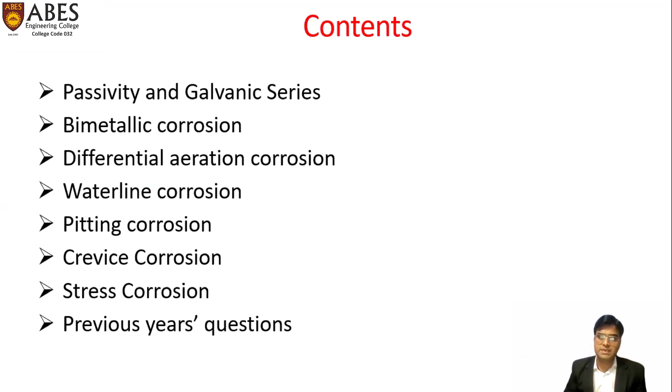So let us first define what is passivity. Passivity is the phenomena by which a metal or alloy shows high corrosion resistance. It exhibits much lower corrosion rate than what can be expected from its position in the electrochemical series. The passivity arises due to the formation of a very thin but highly protective film on the surface of the metal under specific environmental conditions, due to which it begins to act like a noble metal.

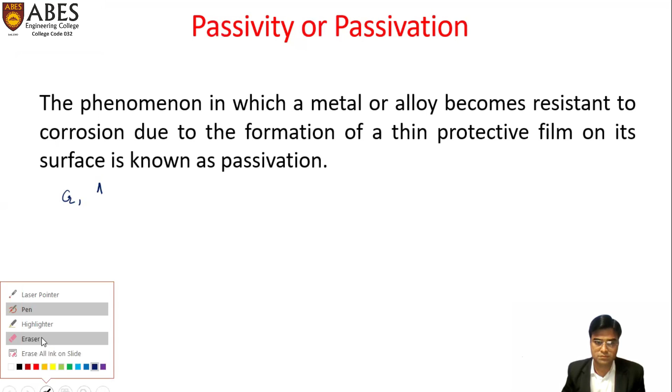For example, metals like chromium, aluminium, nickel, and titanium, and some steel alloys which contain chromium, show exceptional corrosion resistance in oxidizing environments due to the formation of an insoluble oxide film on their surface. So this is how passivity in metals arises.

However, a passive metal can be converted, it can turn into an active metal when environmental conditions are changed.

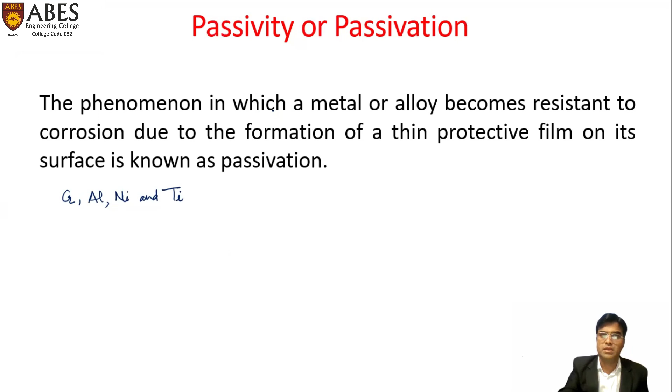As discussed in the previous slide, due to the formation of protective oxide film on the surface, the metal acquires passivity and behaves very differently from what we can predict from its position in the electrochemical series. Hence, a more precise and practical series should be prepared, which may give real and useful information regarding the corrosion behavior of metals and alloys in a given environment.

The greater the difference in position between two metals in this series, the higher the chances that corrosion of the anodic metal will occur.

Now we shall discuss a few specific kinds of corrosion. Among them, the first one is galvanic corrosion. It is also called bimetallic corrosion or differential metal corrosion. As the name suggests, bimetallic corrosion means it should involve two different metals.

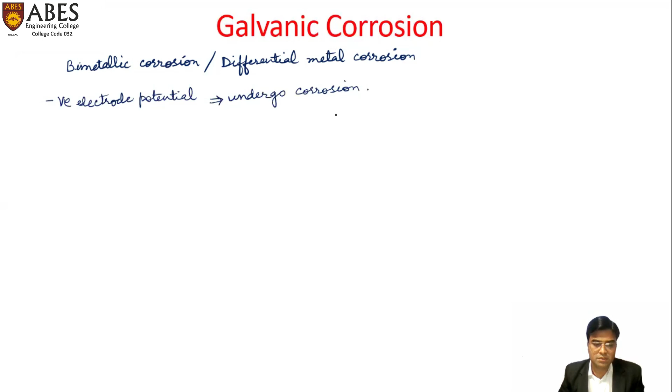For example, if we take zinc and copper and keep them in contact with each other in presence of an electrolyte, then the zinc, which has the lower electrode potential, will form the anode, and the copper, which has higher electrode potential, will form the cathode.

So here we have this zinc rod, and it is in contact with another metal, the copper rod. So this one is the copper rod.

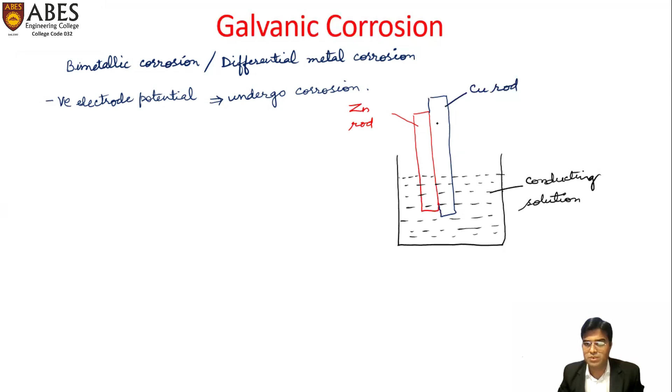When those are exposed to a corrosive environment, this is the conducting solution, which can be any electrolyte. So when exposed to the corrosive environment, the zinc rod, which is near the active end, will undergo corrosion.

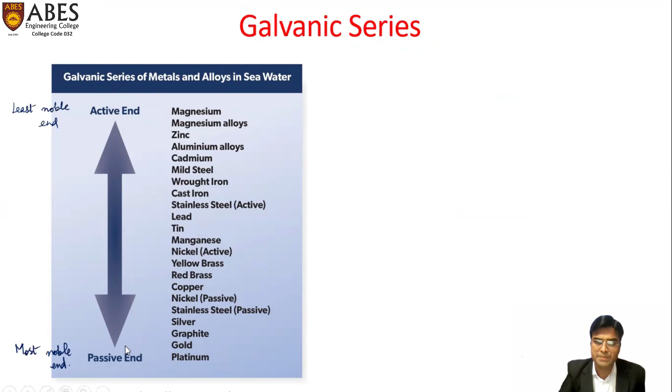It will undergo oxidation, whereas the copper metal, which is near the passive end, remains passive and protected. So zinc is active, forms the anode, and undergoes oxidation, ejecting electrons which move toward the cathode. The copper rod, which is passive, works as the cathode here.

So we can understand here that zinc works as the anode, which undergoes oxidation - that is basically the corrosion process. And copper remains protected due to its passive nature.

So the reaction occurring at the anode can be shown as zinc solid converting to zinc ions, which go into the solution, and electrons are ejected. So this is how zinc undergoes corrosion here.

The galvanic corrosion can be prevented by a few methods. Among them, the first one is avoiding the galvanic couple. It means we should choose the two metals in such a way that the potential difference between those two should be minimum.

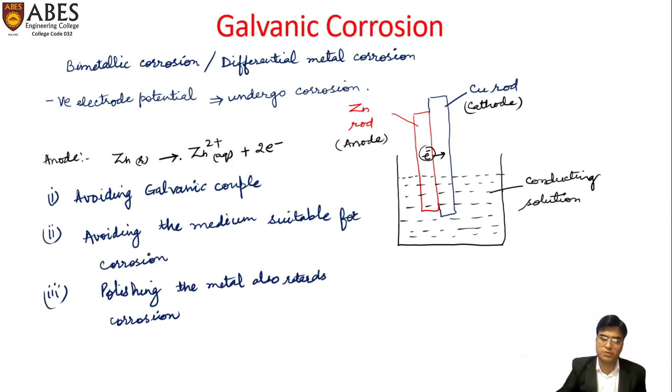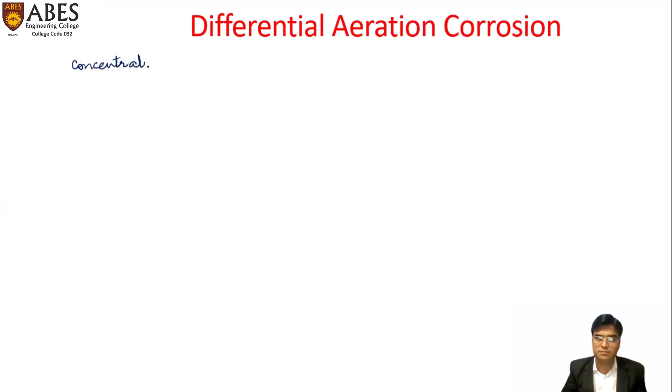The next kind of corrosion which we are going to discuss is differential aeration corrosion. It is also called concentration cell corrosion. This kind of corrosion is self-explanatory by its name. It occurs due to electrochemical attack on the metal surface, when a metal surface is exposed to an electrolyte of varying concentration or varying aeration.

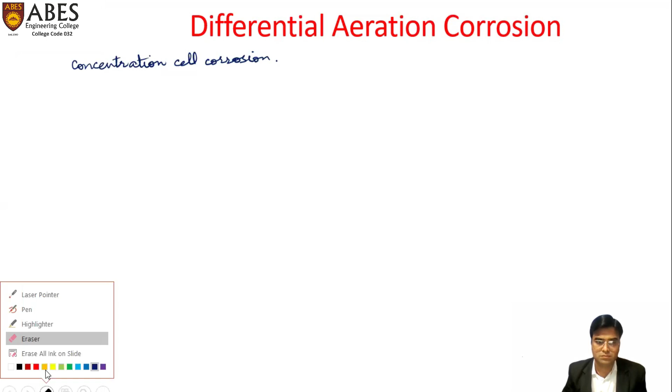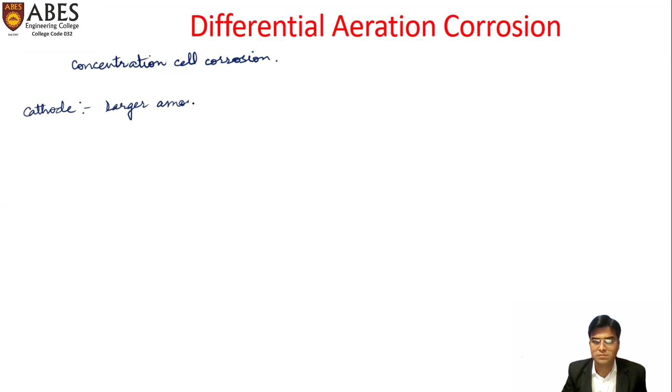Differential aeration occurs when a metal surface is partially immersed in an electrolyte and the other part of the metal is exposed to the air. Under such conditions, the metal areas exposed to a greater amount of air or oxygen behave as cathode, and the areas having lesser amount of air or oxygen work as anode, having lesser amount of oxygen.

We can understand that anode is responsible for oxidation. So the areas having lesser amount of oxygen will undergo oxidation, and this is the area which will suffer corrosion. For example,

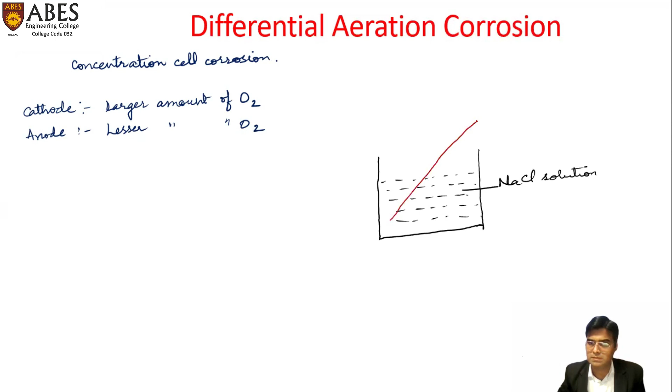we can consider a zinc rod which is partially immersed in a dilute solution of sodium chloride. So this is our container in which we have filled a solution of sodium chloride. In this solution, we have immersed a rod made up of zinc.

The poorly oxygenated metallic part, which is in the solution, becomes anodic. It works as anode and undergoes oxidation. The reaction here is conversion of zinc to zinc 2 plus with removal of electrons. The area exposed to higher concentration of oxygen works as cathode, where the oxygen takes up the electrons ejected from the anode.

The reaction at the cathode can be written as half O2 plus H2O plus 2 electrons, which generate hydroxide ions. The zinc ions from the anode and the hydroxide ions from the cathode combine to form the corrosion product, which is zinc hydroxide.

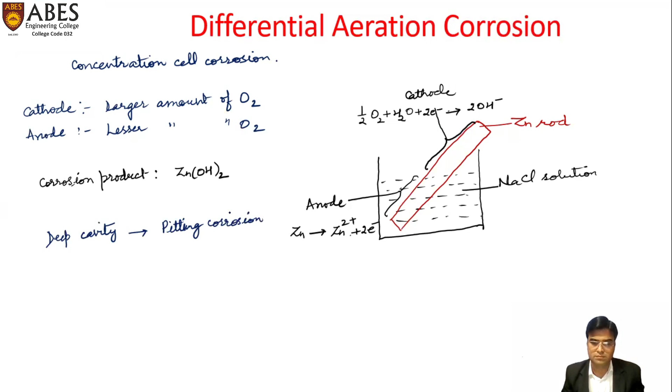The next kind of corrosion is waterline corrosion, a special case of differential aeration corrosion. When we take water and store it in a steel or iron tank for a long time, we can observe some amount of rust begin to accumulate just beneath the level of the water. This is called waterline corrosion, and it occurs due to the difference in aeration at different parts of the tank walls. For example,

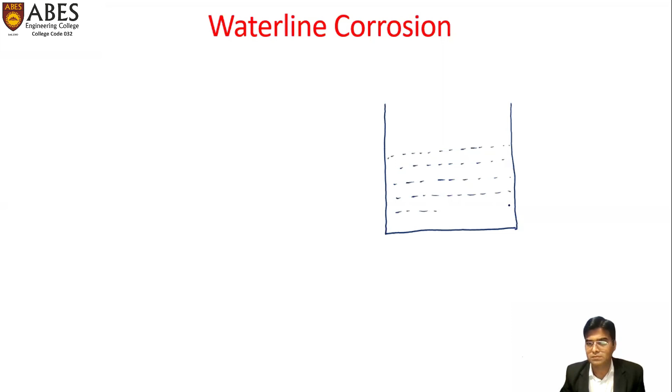we may draw it like this. Suppose this is our water tank, made up of iron or steel, and water is stored here for a long time. So this is water, and this is the steel tank. This is the water level. If the water is held for a long time, we can observe rust just beneath the water level. So this is the rust here.

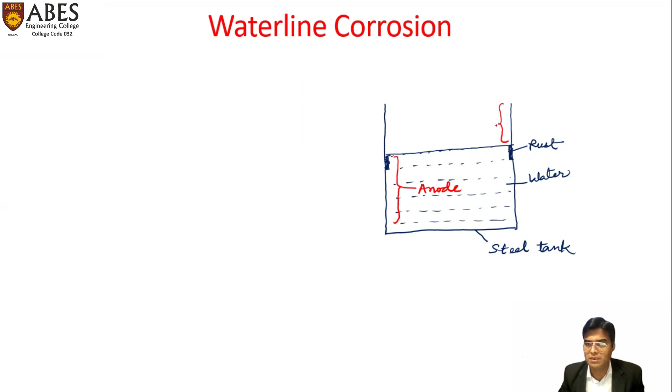It happens because the area above the water line is highly oxygenated, and the area below the water line is poorly oxygenated. So the poorly oxygenated area begins to work as anode, and the highly oxygenated area begins to work as cathode. Due to this difference in aeration, differential aeration corrosion happens here, leading to waterline corrosion.

This area, now working as anode, causes oxidation of iron to occur. The reaction here is iron converted to iron 2 plus, with removal of 2 electrons. These electrons are taken up by the oxygen at the cathode, and the reaction there can be written as half O2 plus H2O plus 2 electrons giving rise to hydroxide ions.

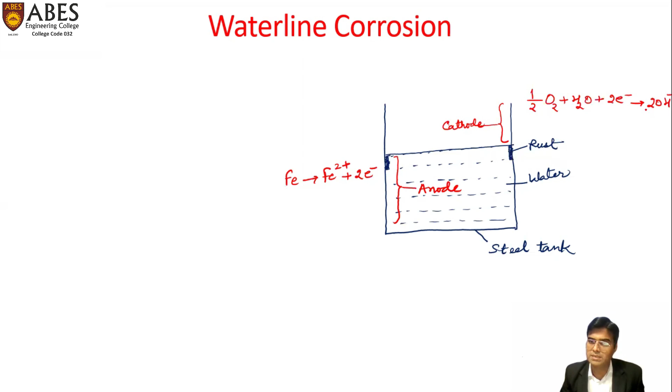So the ferrous ions are generated at the anode, and hydroxide ions at the cathode. These combine to form the corrosion product. Iron 2 plus combines with hydroxide to form ferrous hydroxide, which under oxidizing environment in the atmosphere converts to ferric hydroxide, leading to the formation of rust.

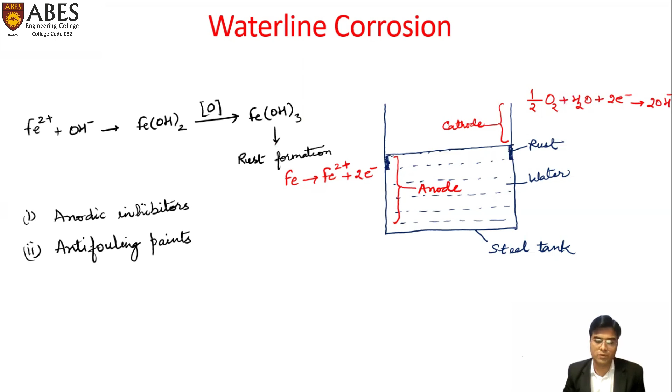This kind of corrosion can be prevented by the use of anodic inhibitors or by the use of anti-fouling paints. We shall discuss them in more detail in the next session, where we shall cover protection from corrosion. The next kind of corrosion is pitting corrosion.

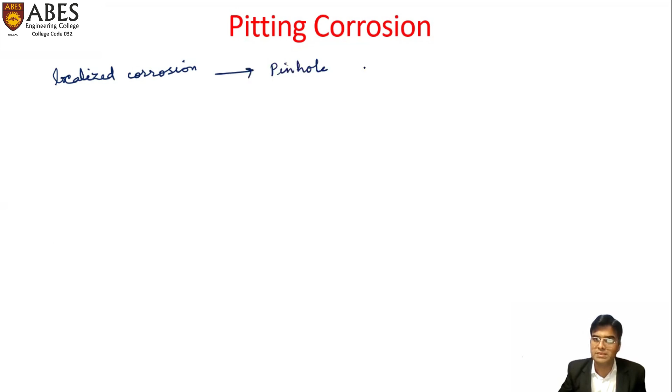The pitting corrosion is a localized corrosion which results in the formation of pinholes, cavities, or pits. It usually takes place when there is a crack in the outer protective oxide layer on the surface of the metal. The crack on the protective film works as anode, and the rest of the oxide layer, which is intact, works as cathode.

Since the area of crack is very small, the anode is very small as compared to the cathode. Because of this very small area of anode, there will be severe corrosion, which will lead to the formation of a small hole or pit in the metal. It can be seen with the help of a diagram.

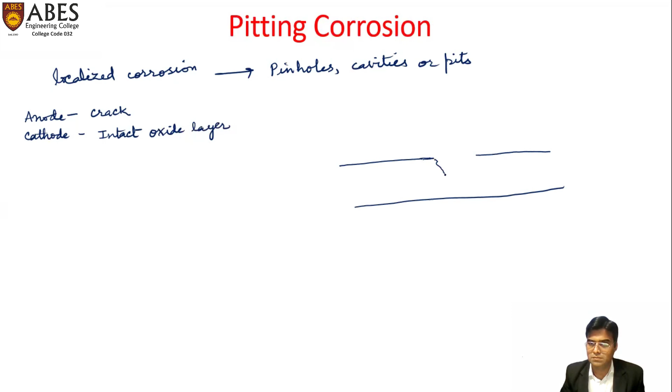Suppose this is the iron bar, and this iron bar had a crack here in the outer oxide layer. So this area will begin to work as anode and it will undergo corrosion. The rest of the area will work as cathode, which is having more access to the oxygen. So corrosion occurs here and the metal undergoes loss of its weight and loss of its strength.

So this area is working as anode, which is having less amount of oxygen. So iron here is converted to iron 2 plus and electrons are removed. This area, which is now working as cathode, it is more oxygenated, and here the reactions which take place can be shown as half oxygen plus water plus 2 electrons convert to the hydroxide ion. So due to the corrosion, the product will accumulate here in the form of rust.

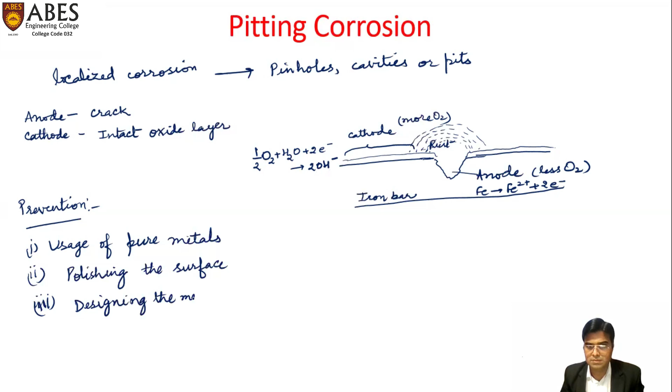In this case, the pitting corrosion can be minimized by usage of pure metals. It means the impurities in the metal should be avoided. Another measure to prevent pitting corrosion is by polishing the metal surface properly. Designing the metal articles judiciously can also be one of the measures to prevent the pitting corrosion. This was about pitting corrosion.

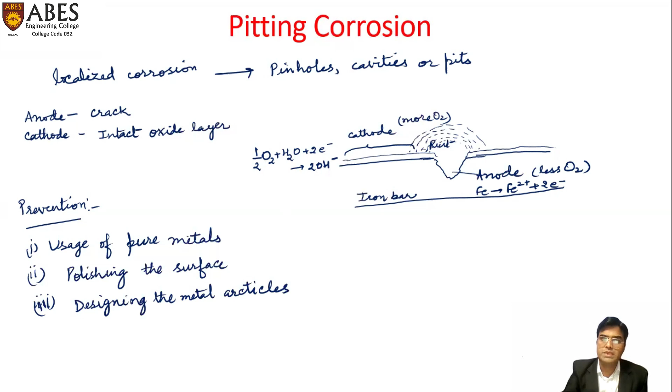Now we shall discuss about the crevice corrosion. The word crevice refers to any kind of gap or crack. So crevice corrosion may be defined as the corrosion occurring at the region of contact of metals with metals or non-metals. For example, the corrosion occurring at the crevices between different metallic objects like bolts, rivets, nuts, washers. These are the examples of crevice corrosion. So crevice has very narrow area.

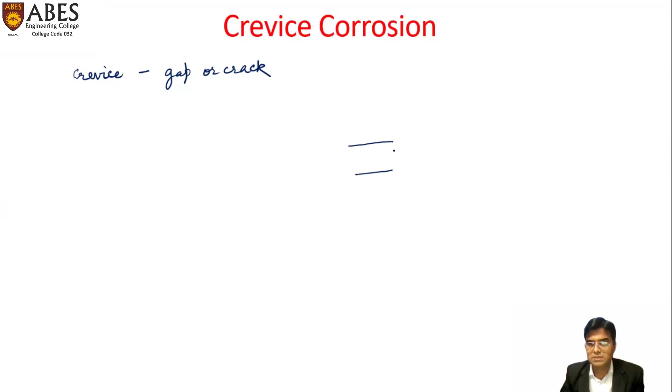For example, it can be shown with the help of a diagram. Suppose this is a metal structure, and here we have a bolt, a nut or a bolt. So these areas are having very narrow dimensions because of lesser amount of oxygen available here. This area undergoes corrosion.

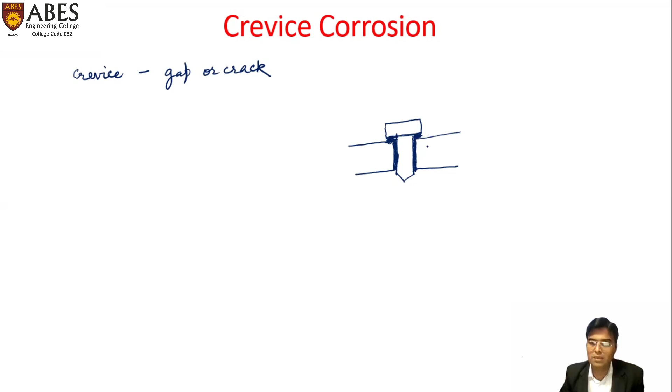Similarly here, due to the lack of oxygen, it works as anode, and this area undergoes corrosion. So this is the rust here, and this rust is due to the anode formation in this area. So this is anode, which is less aerated. This is cathode, which is more aerated.

So in those areas where nuts, bolts, or screws are there, the area which is less aerated becomes the anode, and the area which is exposed to the atmosphere or exposed to the oxygen works as cathode. So the anode undergoes oxidation and it leads to the formation of rust. Deposition of dirt or debris will accelerate this type of corrosion because it will restrict the supply of oxygen to the underneath area.

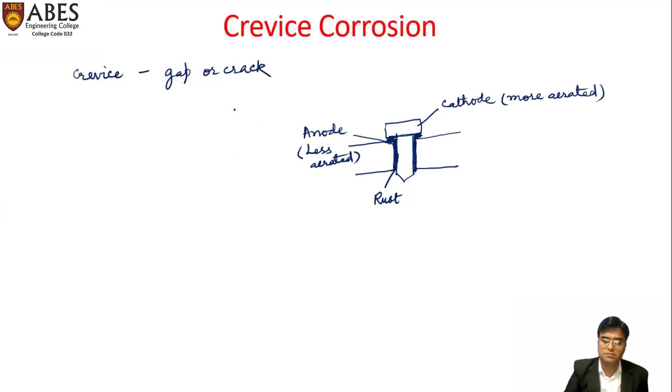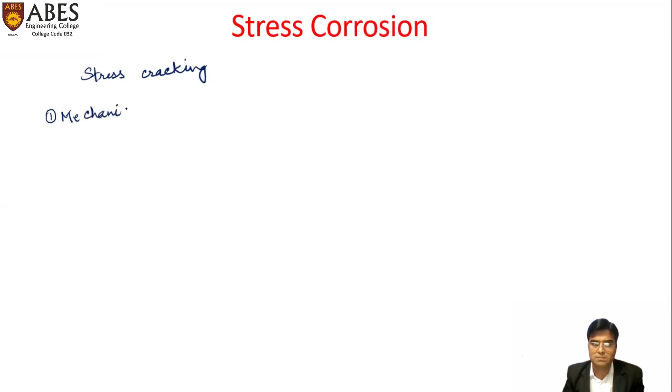Another kind of corrosion is the stress corrosion. The stress corrosion is also called the stress cracking. It takes place due to the combined effect of mechanical stress and the corrosive environment. It means both are necessary for the stress cracking to occur.

If the metal object is under stress and it does not get suitable corrosive environment, then also corrosion will not occur. And if the metal is not having any uneven stress, then the corrosive environment causes the corrosion, but it will not be called as the stress corrosion.

We know when metal articles are fabricated, they undergo several processes like rolling, drawing, and annealing. During rolling and drawing, if the annealing is not done properly, the metal may have uneven stress.

In such cases, the metal areas which are under stress, when those are exposed to the corrosive environment, they begin to behave as the anodic part, and rest of the area which is unstressed works as the cathodic part. So anode is in that area which is stressed, and cathode is that area which is unstressed.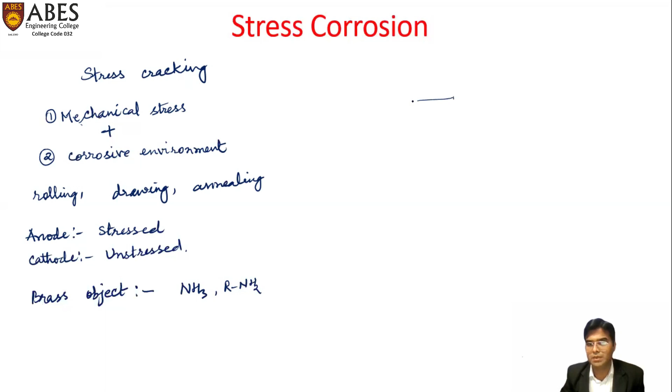Suppose this is our metal object, and here we have different grains. So this is grain A, and this is grain B.

During its fabrication, these areas, if these are unstressed, and this is the stressed part, this area, which is the grain boundary, this is the stressed part.

In that case, it will form anode here, and this area will begin to work as cathode. So because of anode and cathode formation, the corrosion current will begin to flow, and it will lead to the stress corrosion.

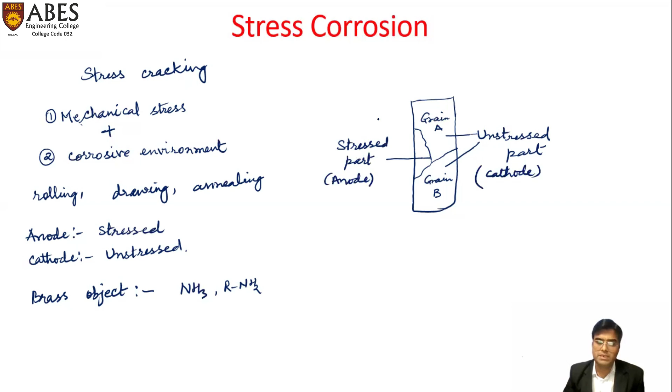Now we shall discuss a few questions which have appeared in the previous year examinations. Question is, why does part of the nail inside the wood undergo corrosion easily?

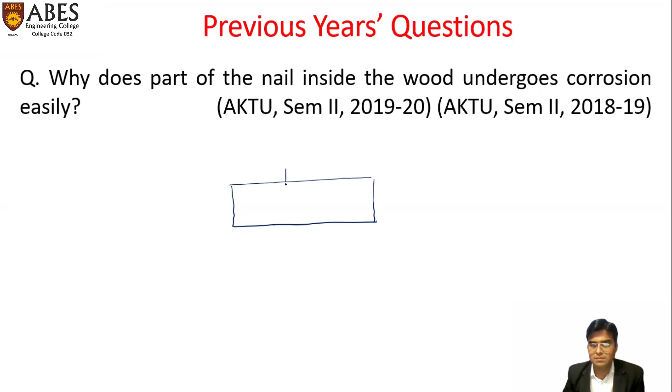Suppose this is a piece of wood, and nail here is shown like this. This area of the nail is inside the wood.

Now we have discussed that the part which is exposed to the air will begin to work as cathode, which has a higher amount of oxygen. So it has more oxygen or more air. And this area has less access to the oxygen. So this area will work as anode because it has less amount of oxygen.

We know oxidation occurs at the anode. So the iron will convert to iron 2 plus, and electrons will be ejected. These electrons will be taken up by the cathode, and here oxygen will take up these electrons to form the hydroxide ion.

So because the oxidation is occurring at the anode, it will undergo corrosion and it will undergo rusting. That's why the part of the nail inside the wood undergoes corrosion easily.

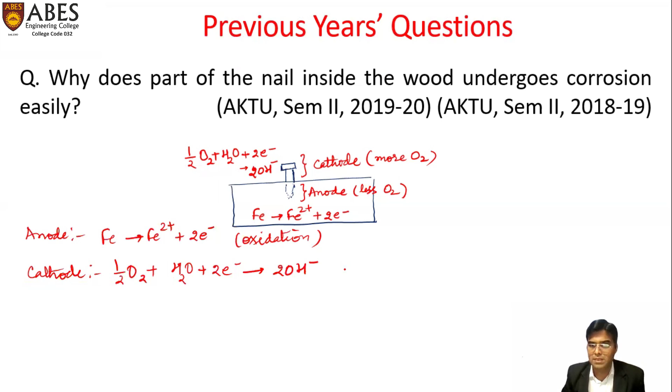At cathode, half O2 plus H2O plus 2 electrons convert to 2 OH minus. This is the reduction process.

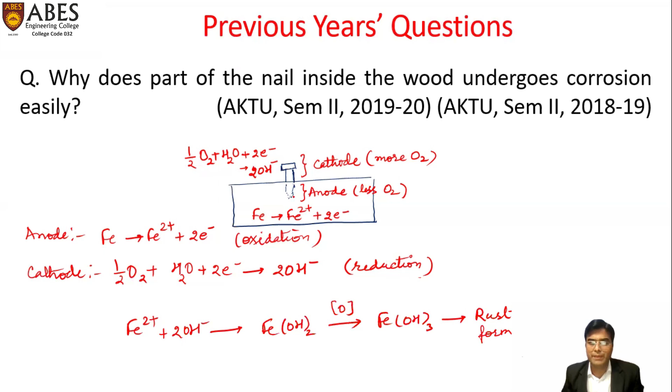And the iron 2 plus and hydroxide ions will combine to form ferrous hydroxide, which under oxidizing atmosphere converts to ferric hydroxide, leading to rust formation. So because the oxidation process is occurring at anode, corrosion is happening at the anode, and that's why the part of the nail inside the wood undergoes corrosion.

Discuss the mechanism of electrochemical corrosion of iron with evolution of hydrogen. This part of the question we have discussed in the previous lecture.

What will happen if a zinc rod is vertically half submerged under water? The same question is also asked in another way: explain why a pure metal rod half immersed vertically in water starts corroding at the bottom. This can be explained in terms of differential aeration corrosion.

Suppose this is the container having water, and here we have a rod of any metal, or zinc, as asked in the first question, it is zinc rod. In the second question, it is given as a pure metal rod. So this is the metal rod.

Some of its part is submerged in the water up to here, and some of its part is exposed to the atmosphere. The area which is exposed to the atmosphere works as cathode, and the area which is submerged in the water, because it has lesser oxygen, works as anode.

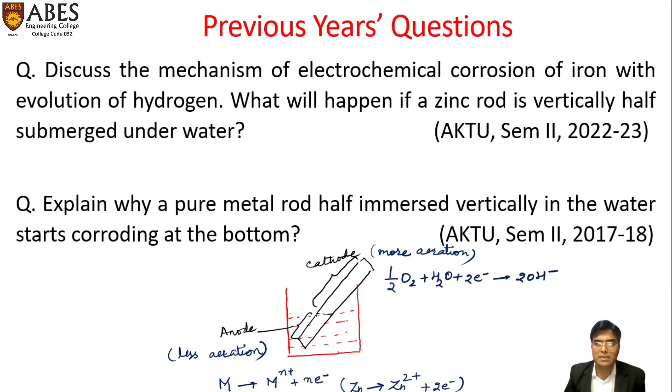We shall write that the part of the metal rod which is immersed in the water has less access to oxygen. Less access of oxygen converts it to the anodic portion, and anode is responsible for oxidation. So the submerged part undergoes corrosion.